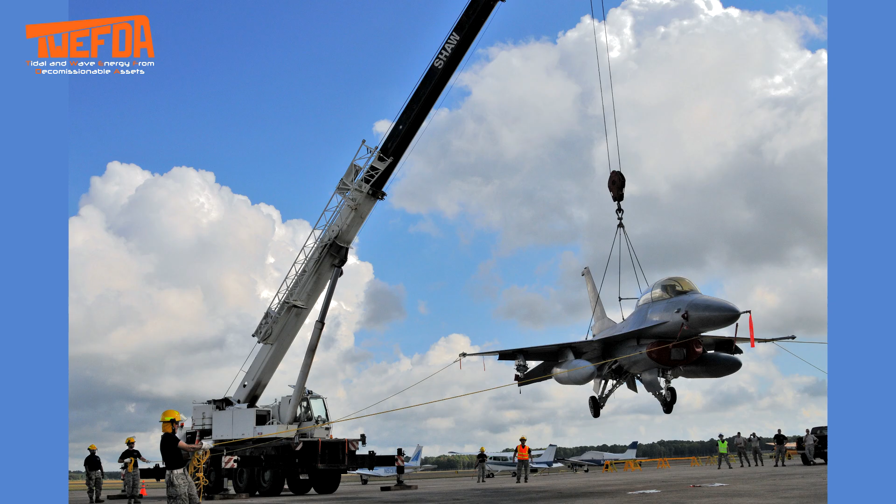Energy drives the world. From breathing to lifting a superstructure, energy is always present, but since it has to be produced instantly, it is also a question of dispatchability. In our journey to sustainability, we are finding that our leading technologies of wind or solar deliver the green power we all want, but are strained as a consequence of the intermittency.

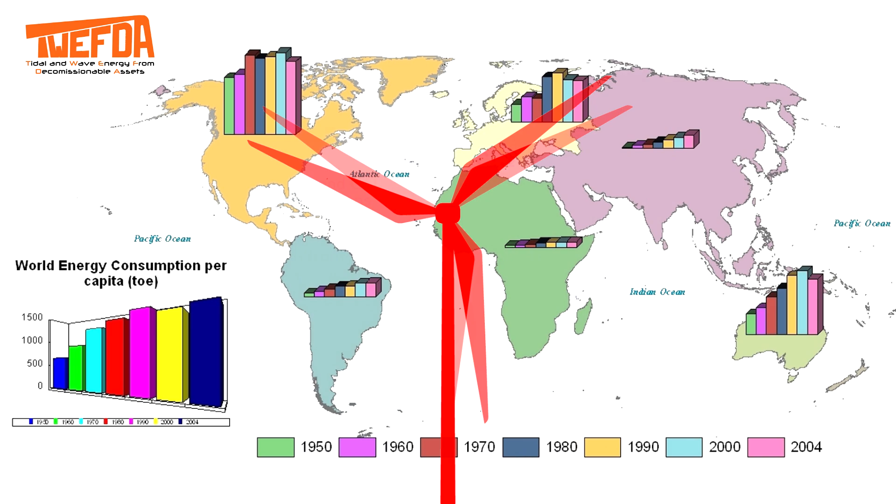The inability to produce renewable energy at any time to keep up with the energy demand is forcing us to burn fossil fuels. In other words, avoiding intermittency is precisely the missing link to transition from our current energy system to a fully decarbonized energy production.

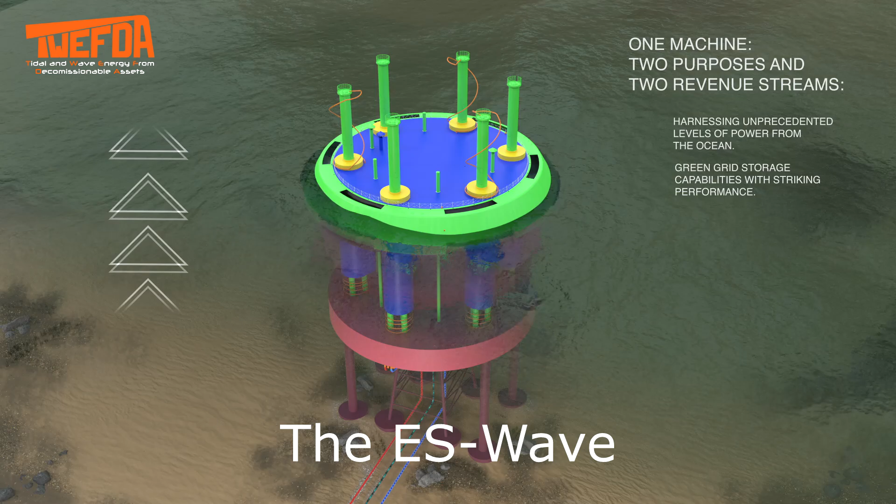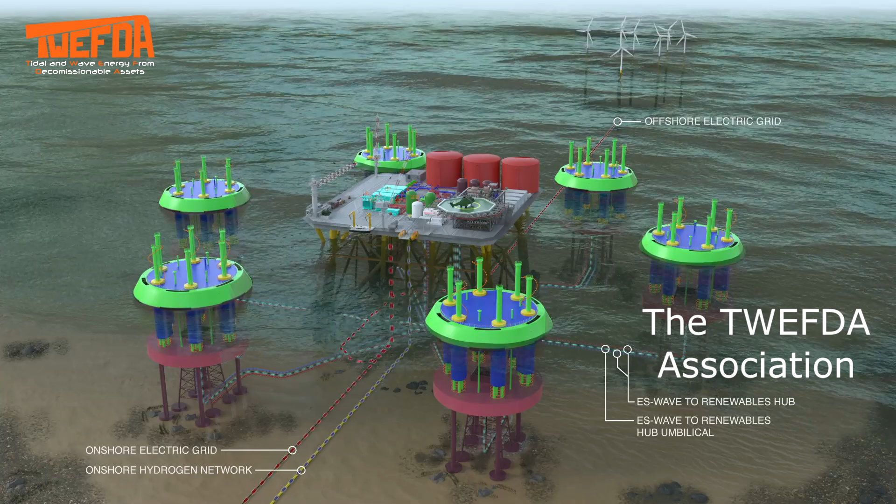Our product has three components. The ES Wave, which is a hybrid wave energy converter with green grid storage capabilities. The TWEFDA Hub, an easily accessible platform typically coming from a refurbished O&G jacket. And the TWEFDA Association, which is typically built with 6 ES Wave devices surrounding the TWEFDA Hub and external contributors that could typically be formed by electric generators connected to the TWEFDA Hub.

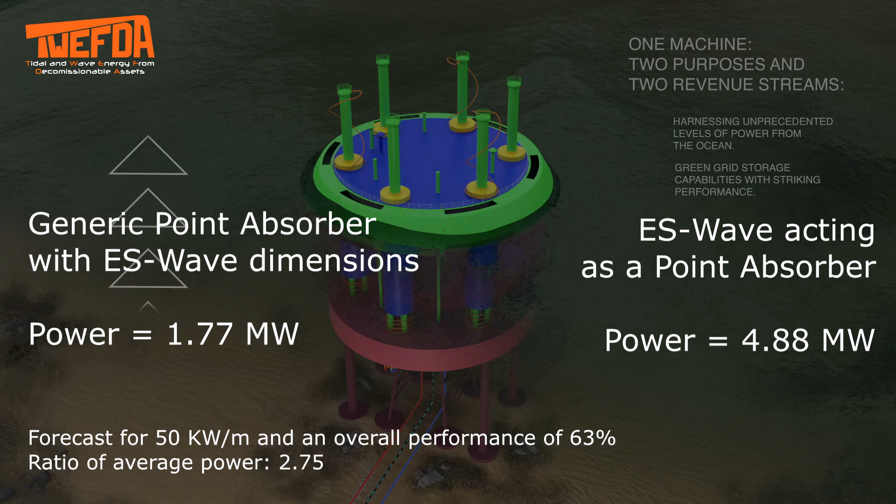The ES Wave can harness a threefold of power thanks to its patented weight-changing mechanisms, uplifting an average of 1.77 megawatts onto an astonishing 4.88 megawatts. The very same machine can absorb about 2 megawatt-hours from the TWEFDA Hub and deliver this energy when required, hence balancing the grid. Since waves can travel long distances before they vanish, the availability of waves is higher than solar or wind, which reduces the intermittency of the resource.

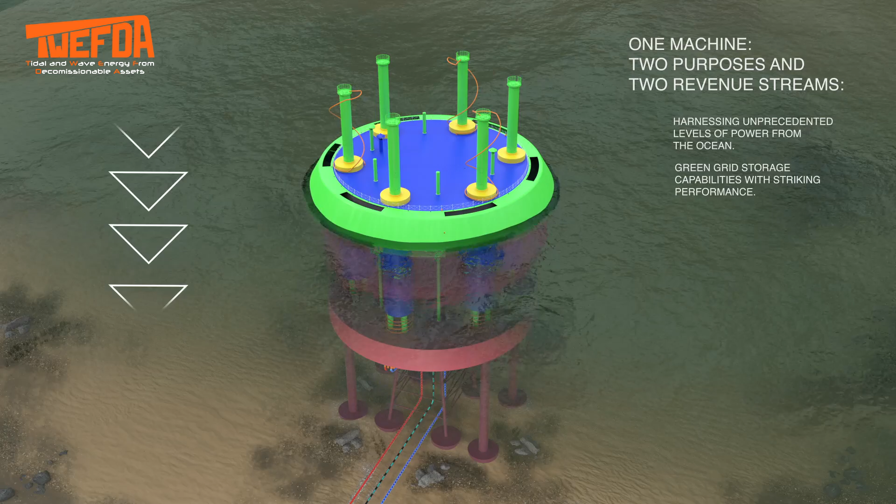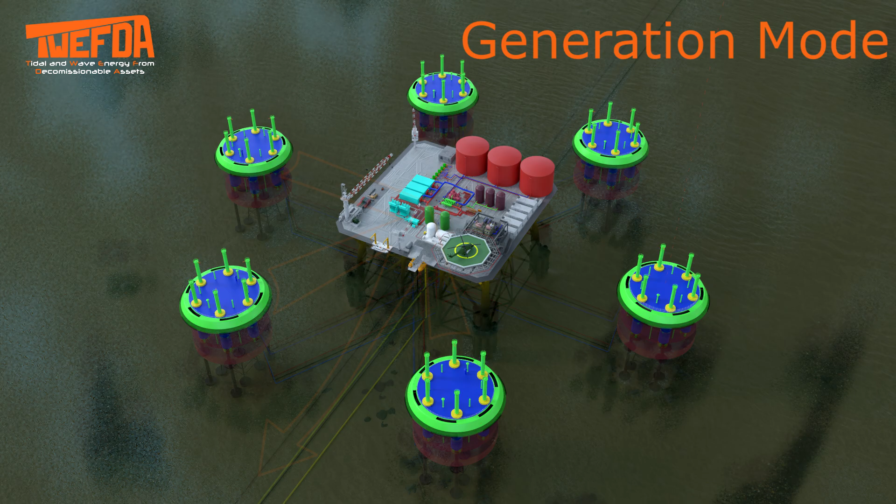In addition, buoys and satellites can help predict a flat ocean, so that some of the ES Wave devices in the TWEFDA Association can pre-store the energy required during the flat ocean. Others can directly provide power to the national grid thanks to the ES Wave ability to also generate. As a result, energy can be delivered on a 24/7 basis. No intermittency represents the missing link and is crucial for a decarbonized world.

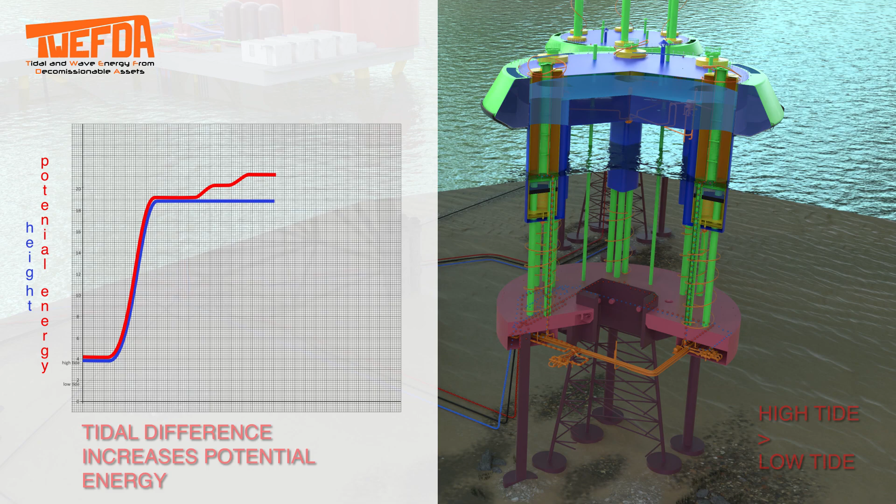The ES Wave can create a pumped hydro application in the middle of the ocean. Not only does it have the ability to ramp up or down the energy absorbed, but it can also increase the energy delivered by using the tidal range. This brings an unprecedented financial opportunity in a world figuring out how to transition to net zero emissions while still fostering economic prosperity and ensuring secure energy supplies.